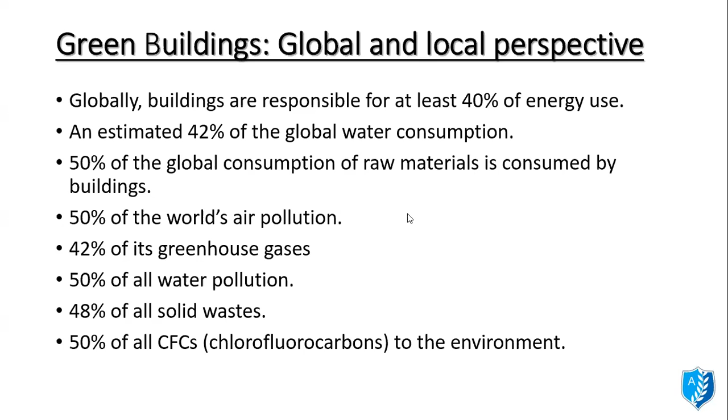If we just go through the timeline, in India in the 1970s, the energy consumption was around 14% by the building sector, which increased to 33% by 2004-2005. Sorry, here is a mistake. Energy consumption till now, till the year 2019, accounted for more than 40% through the buildings that we architects and engineers come up with.

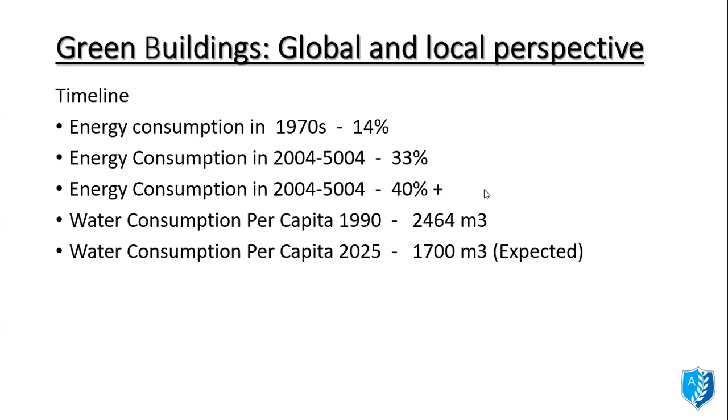Water consumption per capita in the 90s was 2,464 cubic meters, which is expected to get reduced to 1,700 cubic meters. Don't we think these are going to be drastic changes to our lifestyle as well as to Mother Earth? So green building is one of the answers. It is not the complete answer, it is one of the answers.

The wastewater treatment capacity so far is about 7,044 MLD, accounting for only 27% of the wastewater generated. That means the complete wastewater generated presently in India, we are only able to process 27% of it. Solid waste generation in India is to the tune of 48 million tons per annum, out of which about 25% of waste accounts for the construction industry. If you just see, 25% of the waste, it's huge.

Urban heat island impacts give rise to increased temperature by up to 10 degrees Fahrenheit. These are the things that we, as architects, designers, engineers, can contribute to in all these aspects and reduce them drastically. Like if we talk about the 27% of wastewater generated, if we as architects design better and engineers execute better, it can be reduced. This 25% can also be reduced.

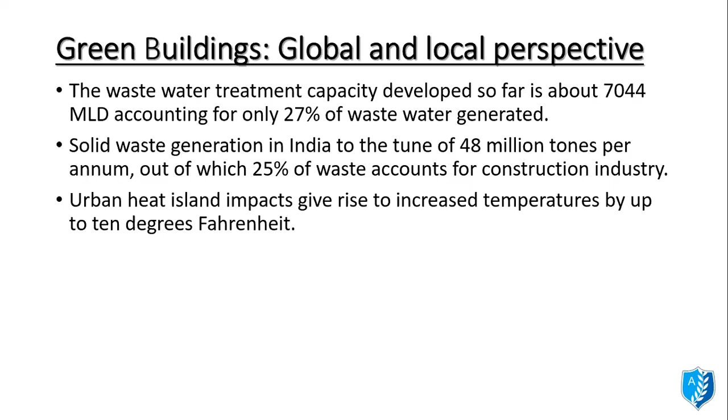Okay, so what is a green building? Buildings have major environmental impacts during their life. Resources such as ground cover, forest, water, and energy are dwindling to give way to buildings. Resource intensive material provides structure to the building, and landscaping adds beauty to it, in turn using up water and pesticides to maintain it.

We as a consultant, as a landscape consultant, or someone dealing with the landscape, we do come up with various plants for our project, which end up consuming lots of water. So as a consultant, what we can change is we can plant some native trees, native species, so that it consumes water according to the climatic condition and according to the soil condition of that area. These are very minute changes we'll be doing in the green building rating, but it will have a drastic impact in the long run.

Energy consuming systems for lighting, air conditioning, and water heating provide comfort to its occupants. These things do provide comfort to the occupants. High-tech control and intelligence added to inanimate buildings so that they can respond to varying conditions and intelligently monitor and control resources, use security, and use of firefighting systems and other such systems in the buildings.

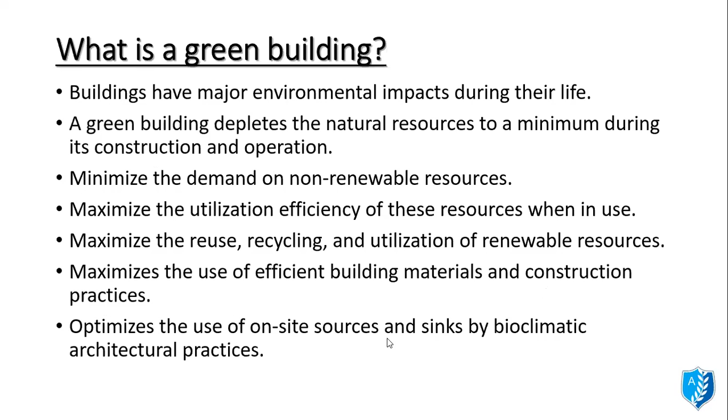Buildings have major environmental impact during their life. A green building depletes natural resources to a minimum during its construction and operation. It minimizes the demand on renewable and non-renewable resources, maximizes the efficiency of these resources when in use, maximizes recycling, reuse and utilization of renewable resources, maximizes the use of efficient building materials and construction practices, and optimizes the use of on-site sources and sinks through bioclimatic architectural practices.

It uses minimum energy to power itself, uses efficient equipment to meet its lighting, air conditioning, and other needs, maximizes the use of renewable energy resources, uses efficient waste and water management practices, and provides comfortable and hygienic indoor working conditions.

Can anyone explain this point? Can we have a very interactive session? Yeah, sure. I want everyone to participate in this. Sorry, but we need to indulge everyone. I think people will join slowly.

Okay, you can explain, Aditya. Comfortable in the sense it could be the amount of light we take inside the building, and the amount of airflow required inside the building for comfortable living, like room temperature and optimum air. For hygienic conditions, we need a number of air changes in the room to avoid sick building syndrome symptoms. For activities in offices and other settings, and even to avoid germs or bacteria like in the present pandemic, I think that will be very helpful. So in such conditions also, we as green building consultants can be very handy to people.

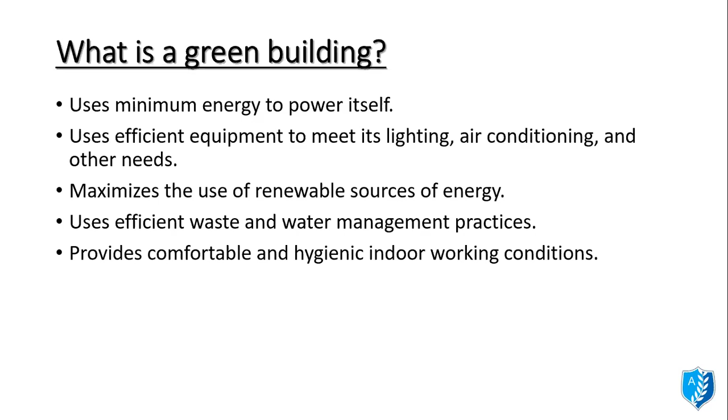Some of the following aspects of green building design are looked at: site planning, building envelope design, building system design like HVAC, electrical lighting, water heating, integration of renewable energy sources to generate energy on site, water and waste management, selection of ecologically sustainable materials with high recycled content and low emission potential, and environmental indoor environmental quality, maintaining indoor thermal and visual comfort and air quality. These are the main headings we will be covering in this course.

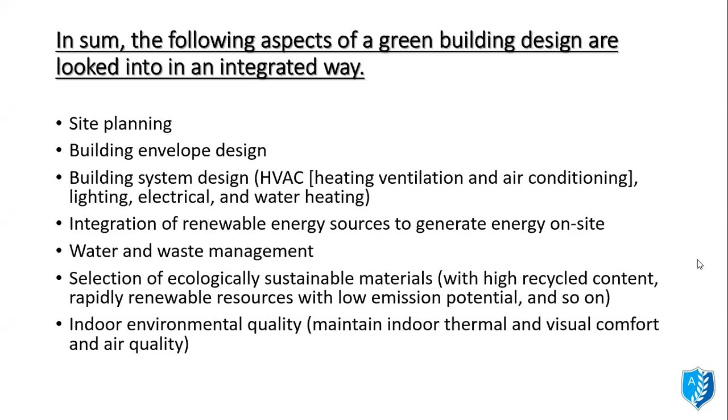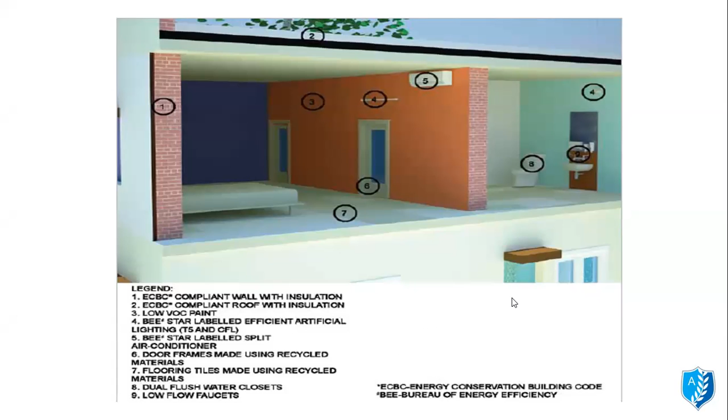Benefits of green buildings: it consumes 40 to 60% less electricity according to the guidelines set by GRIHA, and based on readings done so far, it consumes around 40 to 60% less energy compared to conventional buildings. It also attempts to work towards on-site energy generation through renewable energy utilization to cater to its energy needs.

It consumes 40 to 80% less water, generates lesser waste by employing waste management strategies on site, and generates lesser pollution both during construction and while in use. Green buildings ensure proper safety, health, and sanitation facilities for the laborers, meaning workers on a project undergoing green building rating are assured proper safety, health, and sanitation facilities.

It restricts the use of substances with high ozone depleting potential (ODP) in their systems as well as in finishes. Systems means HVAC and lighting systems, and finishes means the materials used for finishing work.

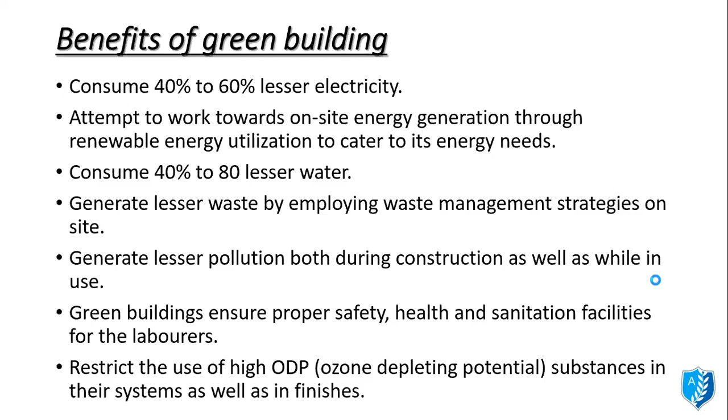Now coming to what is a green building rating system. A green building rating system is an evaluation tool that measures the environmental performance of a building through its life cycle. Throughout the life cycle, we evaluate all those things when going for green building rating. It usually comprises a set of criteria covering various parameters related to design, construction, and operation of a green building. Each criterion has pre-assigned points and sets performance benchmarks and goals that are largely quantifiable.

This means all the criteria involve the indulgence of architects, landscape architects, mechanical engineers, civil engineers, auditors, and electrical engineers. So it covers all those parameters.

The green building rating system covers all those parameters and enhances all the working of these parameters. A project is awarded points once it fulfills the rating criteria. The points are added up and the final rating is decided. All criteria carry certain points, 1 point, 2 points, 5 points, whatever is according to the criteria, and we are granted the points. It is actually a point-based system.

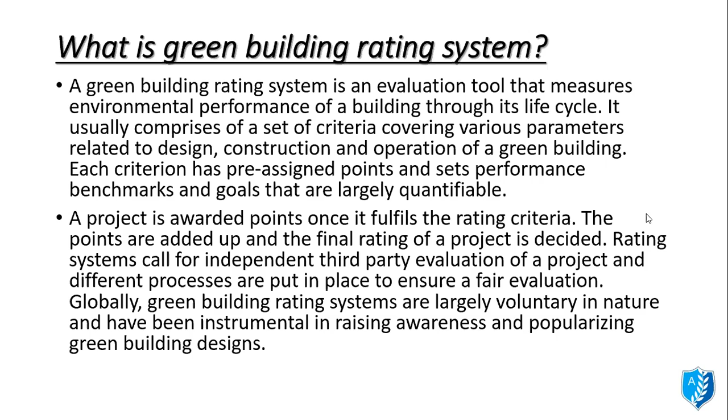So, some introduction to GRIHA. What is GRIHA? GRIHA was developed as an indigenous building rating system, particularly to address and assess non-air conditioned or partially air conditioned buildings. GRIHA has been developed to rate commercial, institutional, and residential buildings in India, emphasizing national environmental concern, regional climatic conditions, and indigenous solutions. GRIHA was basically focused on countering the climatic change that is occurring right now.

GRIHA stresses passive solar techniques for optimizing visual and thermal comfort indoors, and encourages the use of refrigeration-based and energy-demanding air conditioning systems only in cases of extreme thermal discomfort.

GRIHA integrates all relevant Indian codes and standards for building and acts as a tool to facilitate implementation of the same. GRIHA comprises all the guidelines, like the National Building Code, the state building codes, the municipal corporation rules, the MOEF guidelines, the aviation sector guidelines. All these things are comprised in GRIHA. GRIHA takes care of all of this.

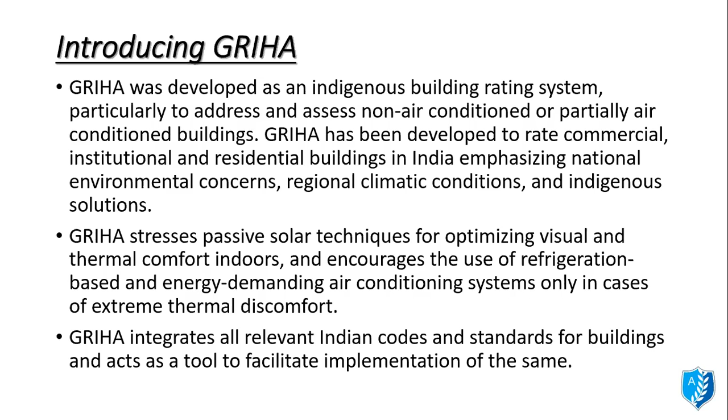So how to get your building rated? All buildings except industrial complexes, which are in the design stage, are eligible for certification under the GRIHA system. Buildings include office spaces, institutional buildings, hotels, hospital buildings, healthcare facilities, and housing complexes. All these categories can go up for the GRIHA rating system.

So what do we think is the basic reason for getting the green building rating system presently in the market, in practical life? Why do we think we should go for a green building rating? Can someone explain this?

It's sure. As of now, the rated buildings are very low, I guess, in India. Maybe they serve as an example for the time being, and at the same time, they consume very less energy compared to any other building of that category or cadre.

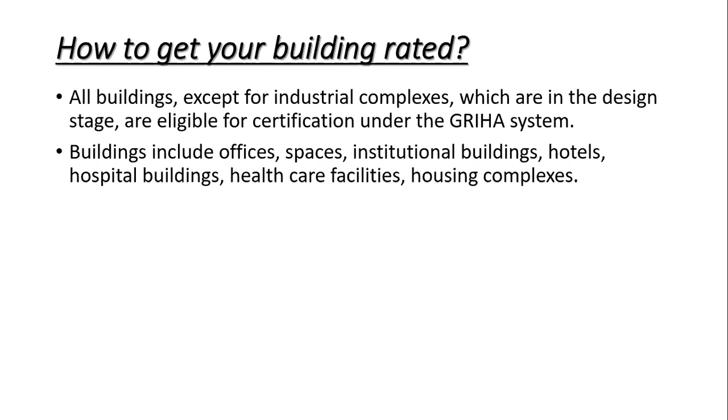Right. Okay, what will be the registration process if you want a project to go for the green building rating system of GRIHA? What do we do?

We go onto the website of GRIHA. The project has to register with the GRIHA secretariat by filling an online registration form available on the GRIHA website, which is www.grihaindia.org.

Registration cost details are available on the web. Registration should preferably be done at the beginning of a project, as there are several issues that need to be addressed at the pre-design stages. When we are at the very beginning of a project, we need to register with GRIHA so that the complete project and process goes on very smoothly.

The registration process includes access to essential information related to rating, application forms, and list of submissions. All these things are put in front of us once we register, and all are stated to us.

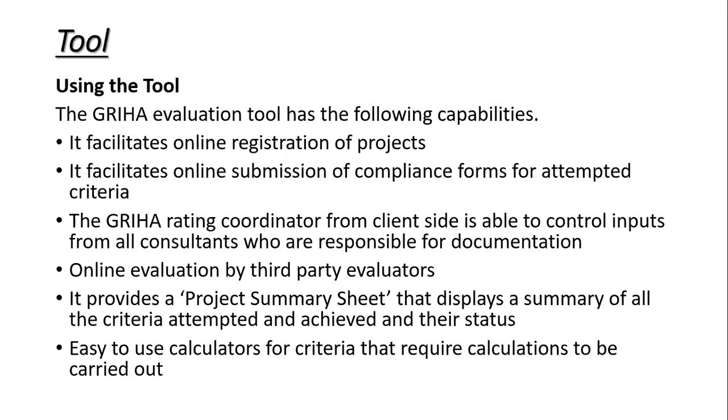There is one more thing: after registration, there is a one-day workshop between GRIHA and the complete project team, conducted to familiarize everyone with the rating system, its main impact, what it is going to achieve, how we are going to achieve it, and what all aspects are to be covered.

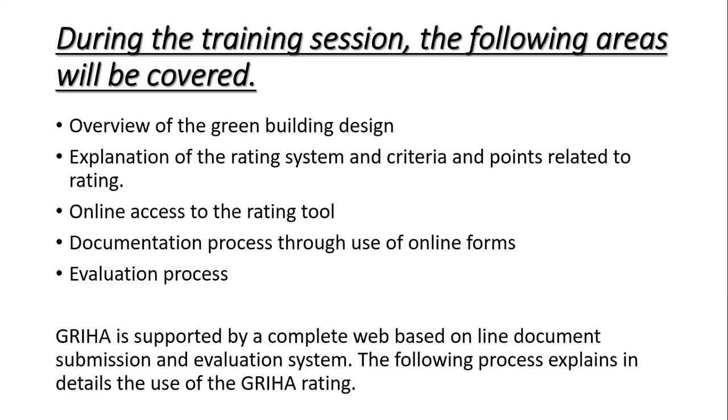During the training session, the following areas will be covered: overview of green building design, explanation of the rating system and criteria and points related to rating, online access to the rating tool, and the documentation process.